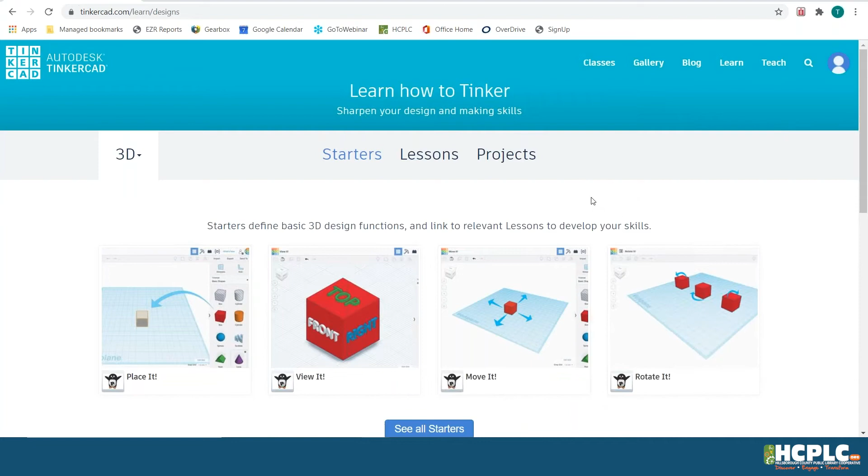And the most important one I want to highlight here today before we jump into designing something is Learn. So I highly encourage you when you do get logged into Tinkercad later to take a look at this Learn page, because it has tutorials that go more in depth on how to make things in Tinkercad. It has a ton of stuff that you can do. It has lessons that you can follow along with, and it also has projects. So it has a bunch of really cool things for you to do that you can play around with and really get a good grasp on how Tinkercad works.

So let's make something. So I am going to click on Create New Design. Okay, so you can see everything that populates here that comes up on your page. The first thing that I want to point out is how you make things in Tinkercad. So the most important thing to remember is that you make more complex shapes by using simpler shapes. So on the right-hand side of your screen here, you can see that there are a ton of shapes.

So you got your basic shapes, you got your box, you got your cylinder. I'm just going to scroll down here so you can get an idea of what you have. So these are all of the shapes that you have in Tinkercad to make your more complex item. So today we are going to make a very, very primitive house. And you're going to see how we're going to do that here in just a minute. Another thing that I want to highlight is what's called your work plane. So you can see here it says work plane on the screen.

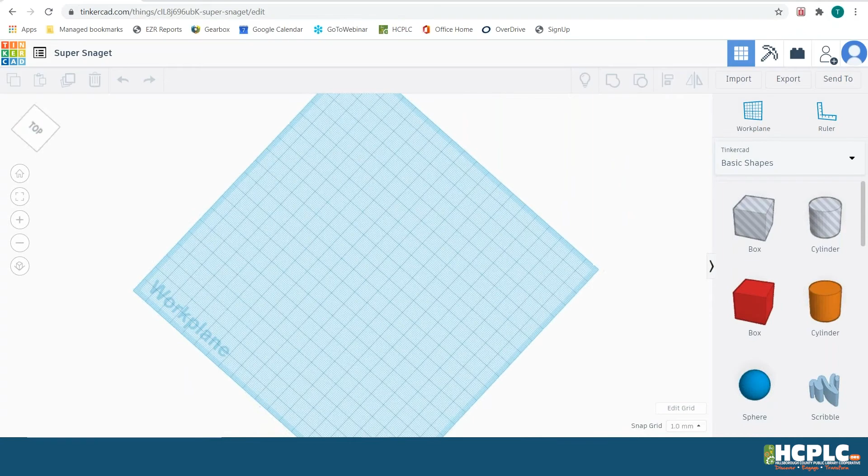So I can zoom in and out with my cursor. And if I hold my scroll wheel down, you can move your work plane around. And if you right click, you can look all around it. So this is going to make more sense when I drag out my first shape, which we're going to work with, the box. So I just click and drag my box onto the work plane.

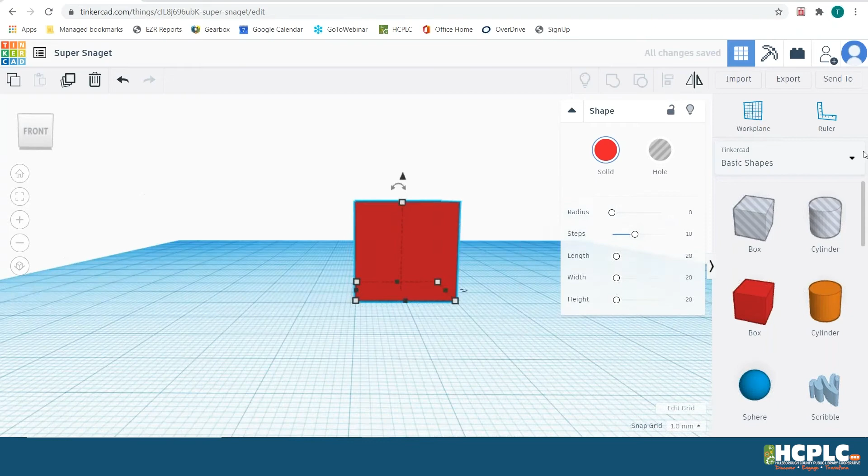And I see we got some questions. Don't worry, I'm going to get to them at the end. So here, let me actually keep that open.

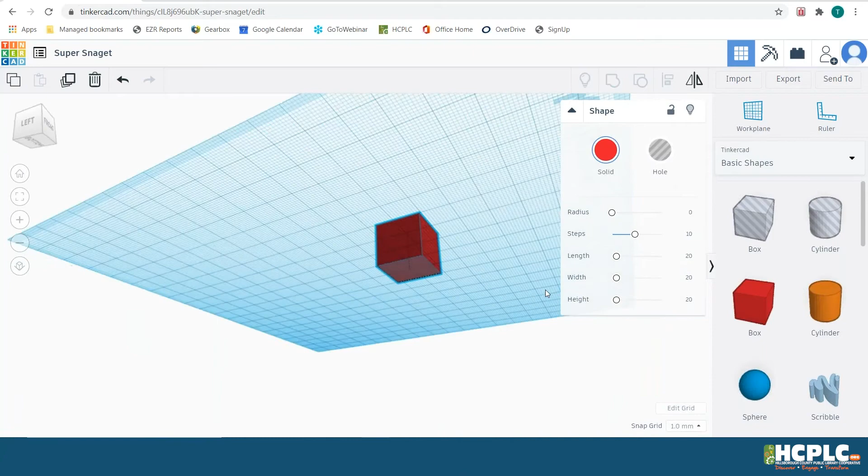So here we got our box. And now you can see what I mean when I'm moving around my work plane. So I'm using my right click and I'm holding it down to move around my work plane. So you can see the bottom of my box, I can see the top, and I can see the side. So now I am going to hover my mouse over my box so we can look at a couple of the elements of how Tinkercad works.

So Tinkercad uses millimeters. So that's how they measure things. So when you see, let me click on that again, this 20 by 20, that is 20 millimeters by 20 millimeters. You are able to change it to inches if you like, but I'm sure as all of the kids are learning in science, most scientists and most things in the scientific fields do use metric. So it's probably just a good way to learn your metric. And as you will learn tomorrow, if you attend our 3D printing class, a lot of 3D printers are configured to work in millimeters. So Tinkercad does use millimeters.

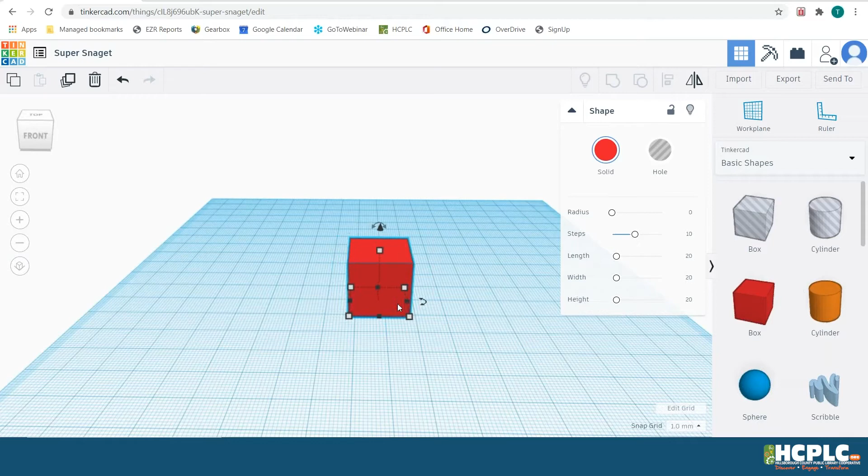Also on the grid, you can use your arrow keys to move your shape around the work plane. I'm using my arrow keys on my keyboard to move. And right now, my box is moving around by 1 millimeter. So each one of these teeny tiny, let me zoom in, each one of these teeny tiny little boxes is a millimeter. And the larger box is 10 millimeters. If you wanted to change how your items move, where it says snap grid here, you could make it so that it moves by 0.1 if you wanted to, or by 5. But today we're just going to leave that how it is.

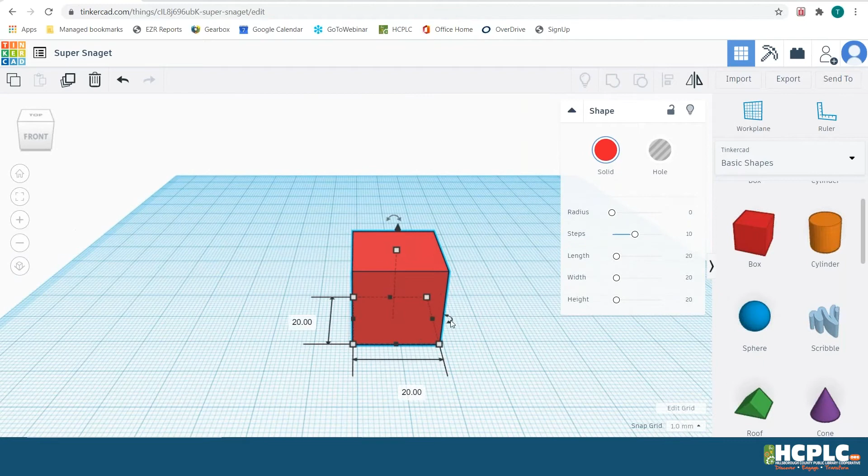Now I'm going to make a little house today, and I actually think that 20 by 20 is a little bit bigger than I'd like it to be. So I'm going to make it 15 by 15. So one thing to remember about Tinkercad is that there are a ton of different ways to do the same thing. So I'm going to just show you one way to change the dimensions of your shape. So I want mine to be 15 millimeters by 15 millimeters.

So I'm going to zoom in a little here so you guys can see it. I am going to take this white square here and I am going to move it in. So 15 by, oops, we got it there, 15. And if you click on the top one, you can see here it says 20 millimeters. I'm going to go ahead and leave that 20 millimeters. So that's one way that you can change the dimension of your shape.

So we've done our first part. We've designed the first part of our house. We made the base part of our house. Like I said, it's very, very primitive, but it's still going to look like a house. Actually, I'll show you another way that you can change it, on your panel here. Now this panel doesn't come up for every shape, which is why I'm not going to use it today, but I am going to minimize that here so we have a little bit more room.

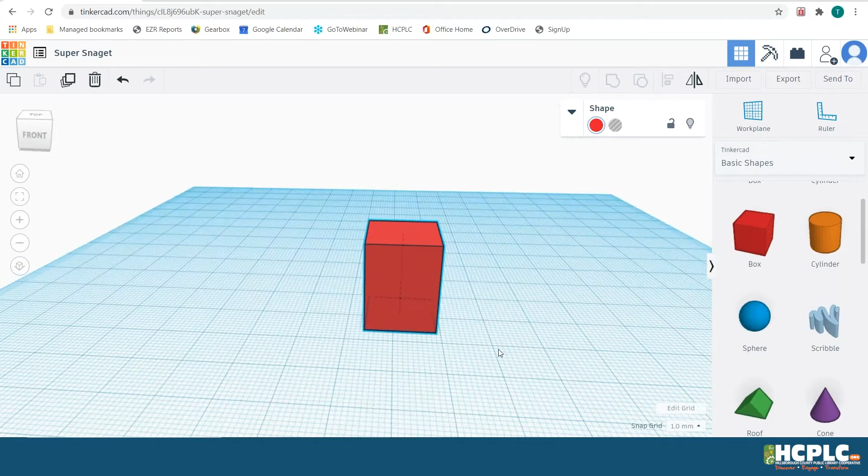So on to our next step. What does every house need? Every house needs a roof. So I'm going to go back to my panel here and I see my green roof.

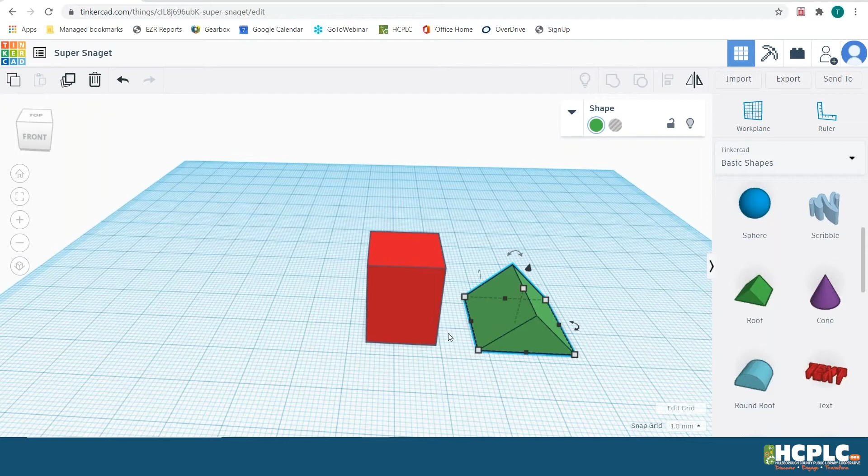And I'm going to drag it out. So now I have a roof. Now, what's the big problem with our roof here? The roof is sitting on the ground, directly on the work plane. We want our roof to be on top of our house.

So I'm going to actually leave the dimensions of my roof. I'm not going to change it. So it is 20. Oops, let me scroll out so you can see. It is 20 by 20, and I'm going to go ahead and leave that alone. And the reason why I put this down 15 by 15 is so that the roof is hanging over a little bit. You know, like when you're running home and it's raining, the roof is hanging over a little bit so you don't get rained on, kind of that same concept.

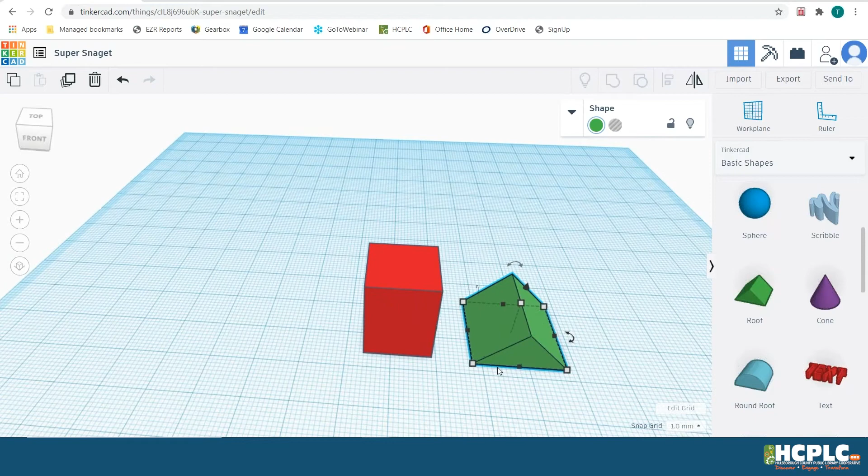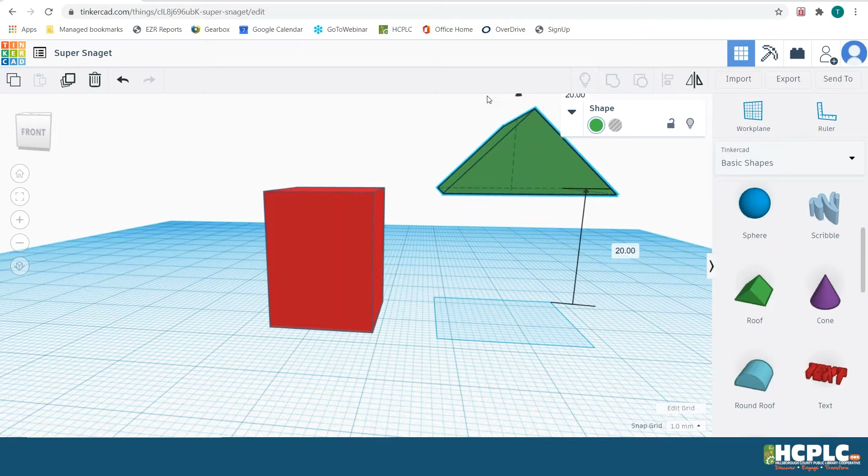So the first thing I am going to do with my roof is raise the roof so it can sit on top of my house, the base of my house. As we saw before, as I hover over this white square here, our house is 20 millimeters high. I call this little black thingy here a caret. So what I am going to do with my caret is raise the roof to 20 millimeters. So now it is up 20 millimeters high, ready to sit on my house.

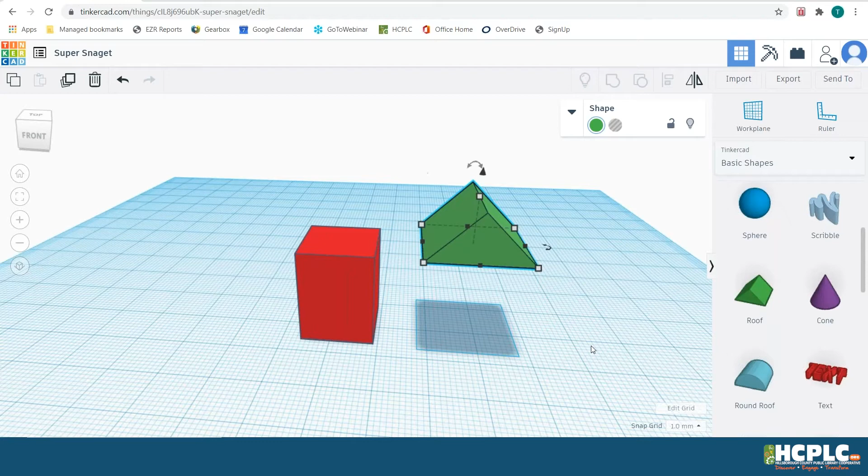Now, again, what's wrong with our house here? The roof is way too far away from the actual house. So we are now going to look into the concept of aligning and grouping. So how do we do that? What am I talking about? Let's go ahead and dive in. The first thing you're going to want to do when you are dealing with two separate pieces of geometry to make your shape is select both shapes.

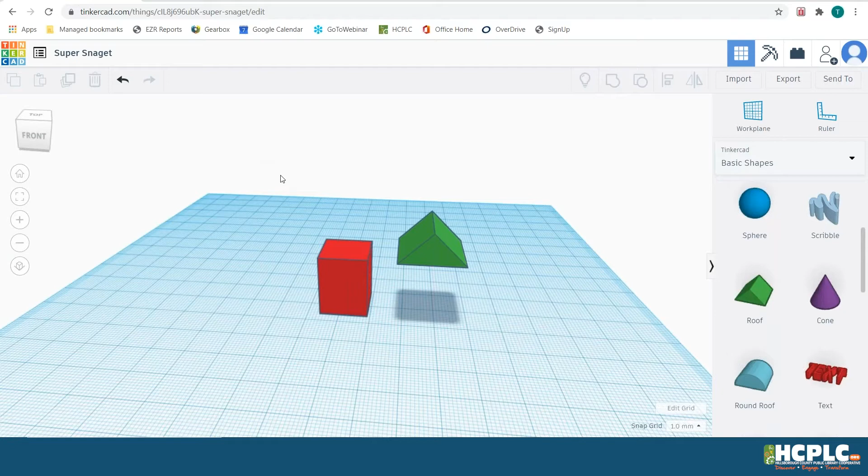The easiest way to select more than one shape is to draw a boundary box. Again, you're probably wondering, how do you do that? It is really easy. I have my mouse here, you can see it out to the left, and I'm going to hold down my left click. I'm holding it down, and I am going to start to draw my boundary box. Remember, you're holding down your left click to make this boundary box. And I am going to select both items. Once both items are within your boundary box, you let go.

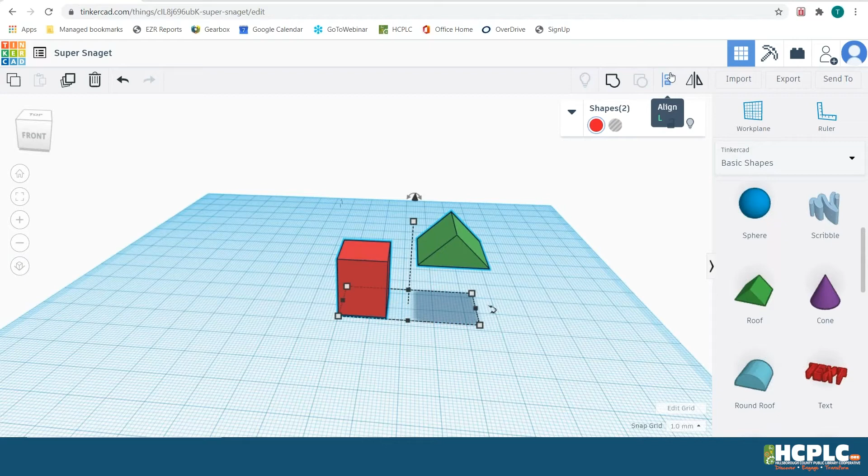So now both of my items are selected. Oops, I just unselected them. As you can see, now they move around together. So that's step one. Step two, again, our roof is way over to the right-hand side of our house. So up in your toolbar, we are going to align. When you hover over the different items here, you can see what they do. So we are going to select align. And you can see there's a bunch of little dots and lines that came up. When you hover over each line, it tells you how the shape will look once it's aligned.

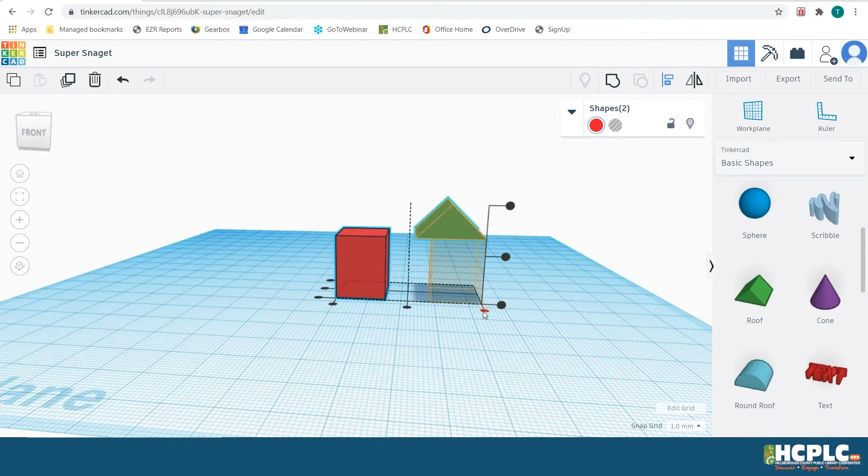We want our house and our roof to be sitting on top of one another. Let me scroll in so you can really see. When you hover over, you can see the outline of what it'll look like once it's complete. So that's what we want our house to look like, right? We want to make sure that it's aligned perfectly. As you saw before, I could technically drag everything over myself and keep using my mouse to line everything up.

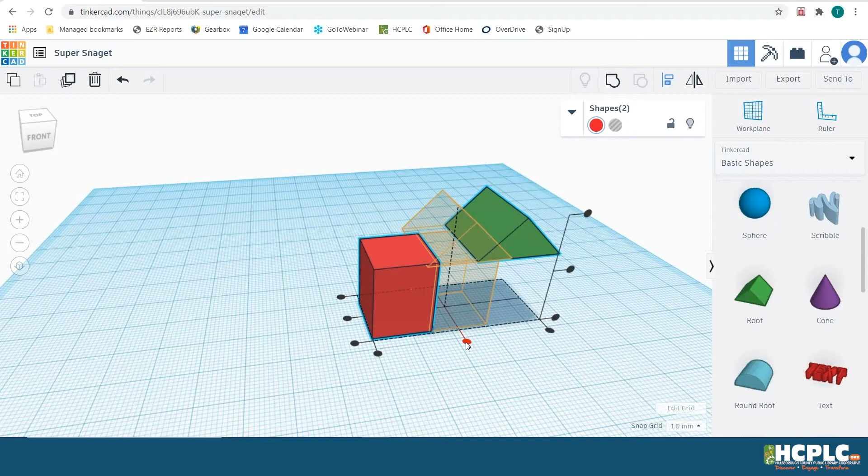But what I really like about our align button is that it makes everything perfect for you. Oops, almost perfect. I need to align it one more time. There we go. So now, as you can see, the roof is perfectly aligned with my house. And once I'm done, I can just click away. Now, there's one more problem with my roof and my house.

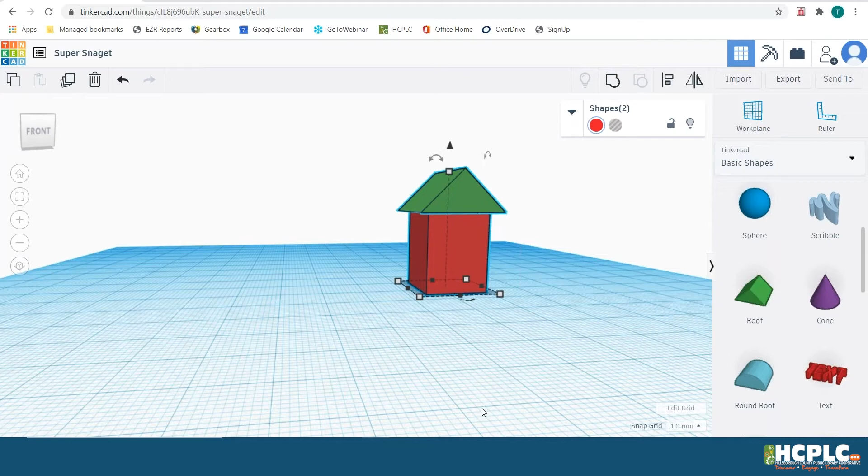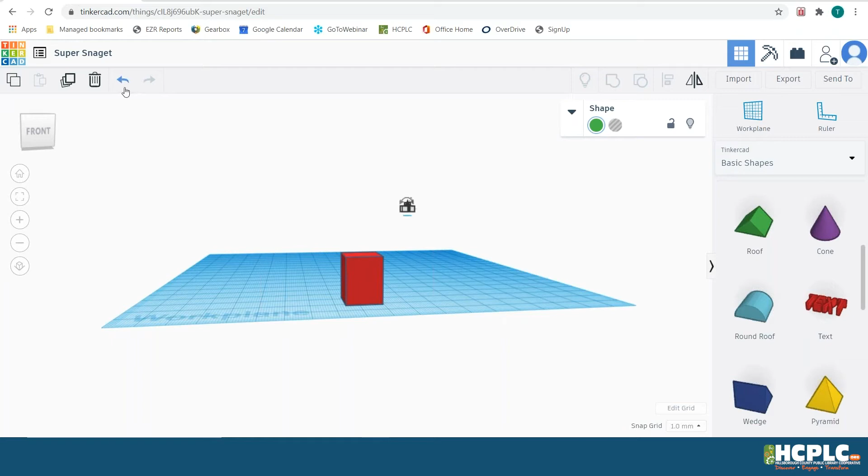Uh-oh, they're not connected. So this is another cool thing I want to tell you about Tinkercad: it automatically saves everything. So if you mess up or forget to save, it's already saved. Another great aspect of Tinkercad is the handy dandy undo. I'm going to press undo because I dragged my roof away from my house, and now it's back on there.

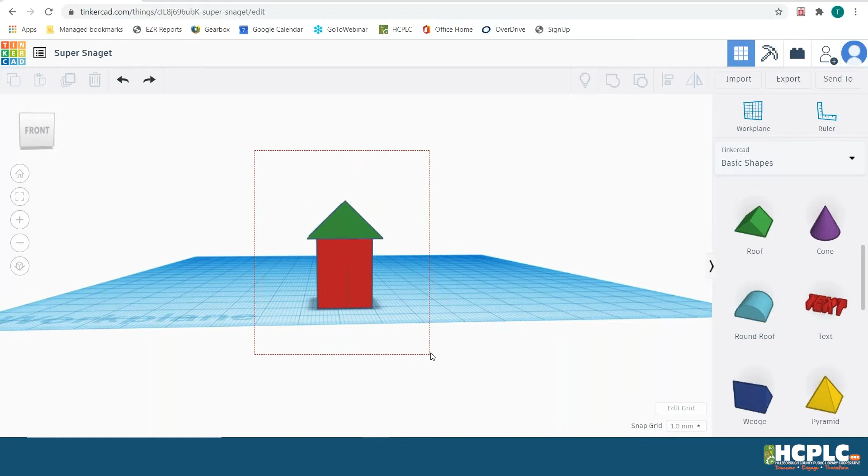In order to make sure my roof and my house are connected, we are going to group them together. So how do we group? Remember that boundary box I talked about earlier. I'm going to left click, hold down the left click key on my mouse, and draw that boundary box. Now both of my items are selected. I'm going to go up to my toolbar up top and select group. Remember, when you hover over each thing, it tells you what it is. So I'm going to hit group.

And now my house and my roof are attached. Oops, that's where the handy dandy undo button comes in handy. So here you go, now my house and roof are put together, and now you have a complete-ish house. Another way you can make sure your item is grouped together is that they change to the same color. Remember, our roof was green, now it's red to match the rest of the house. So now you have a nice house put together.

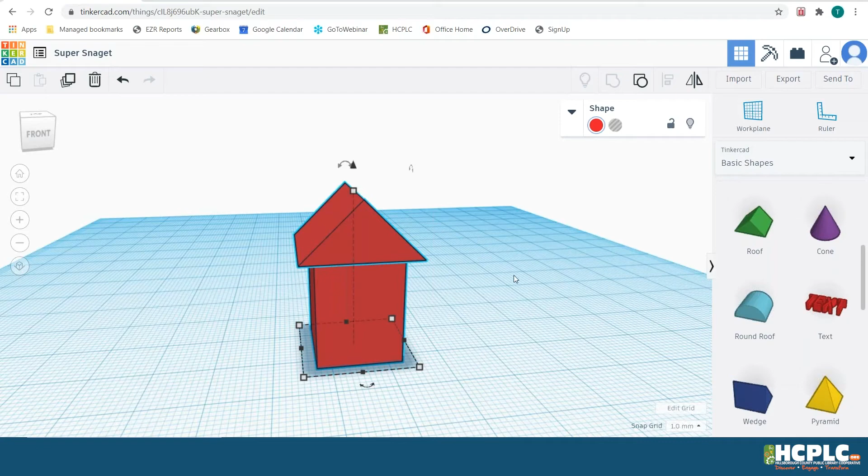So the last thing, and I wish I had more time to show you more because there's so much cool stuff Tinkercad does, but I know we got some questions so I want to make sure we get to those. Let's say, oh no, I don't want this roof, or I want to make my roof bigger or smaller.

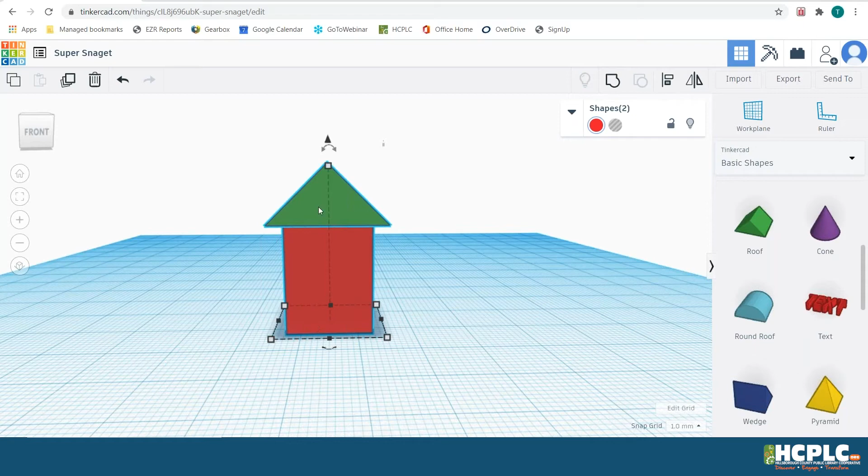You can always ungroup. Ungroup is right next to group. So if you want to take them apart to tweak or fix things, all you have to do is hit ungroup. Again, you can tell your items are ungrouped because of the colors. So I'm going to group them back together.

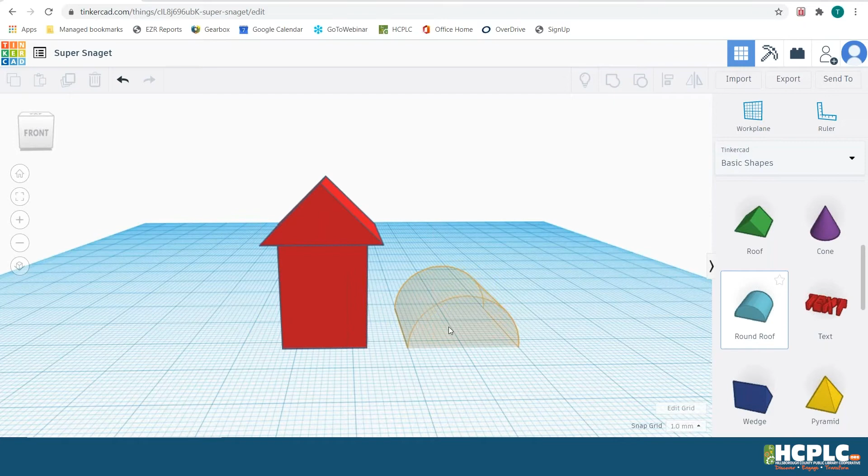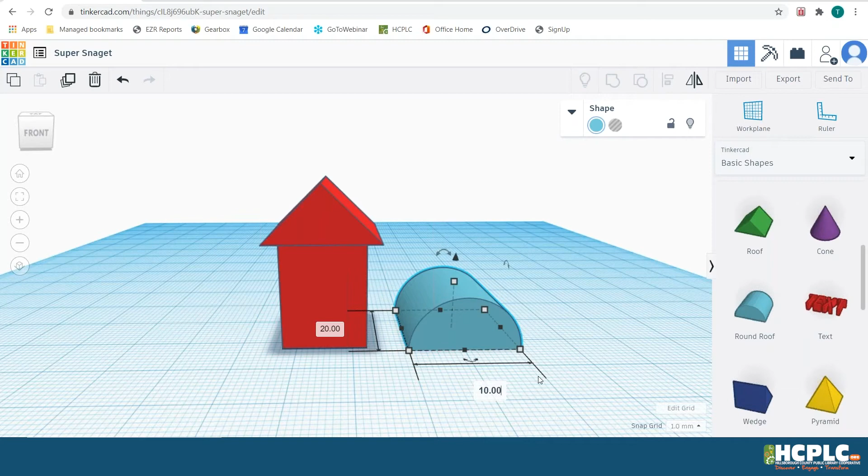Last but not least, your house needs an opening, so we are going to create one. I'm going to use the round roof, although a little differently. I'm going to drag out our round roof. Remember how we changed dimensions? Let me show you a different way to change dimensions. I want this value here to be 10. If you double click on the value, you can then type in 10 and change it. That's another way you can change the size of something.

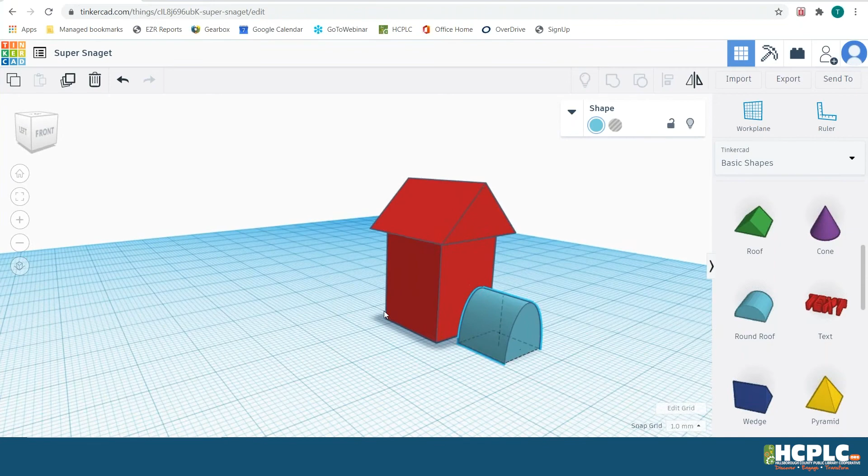I'm just going to drag this one in here, and make that 10. There we go. Again, our house needs an opening, so I am going to position this shape to create my opening. This is where a mouse definitely comes in handy. I'm using my mouse right now to position the opening of my house. Now I clicked on my opening and I'm going to push it in a little bit into the house. I know you're probably at home thinking, what is she about to do?

So one thing you may want to do with your shapes - remember how I said you can put different shapes together to create objects - you can also use a shape to subtract from an existing shape to make another shape. Let me show you how that works. I'm going to reopen that panel I discussed earlier, and you'll see an option called Hole. I'm going to click away from everything to make sure I select the one thing I want to use. Let me reselect my opening. I am going to make this opening into a hole.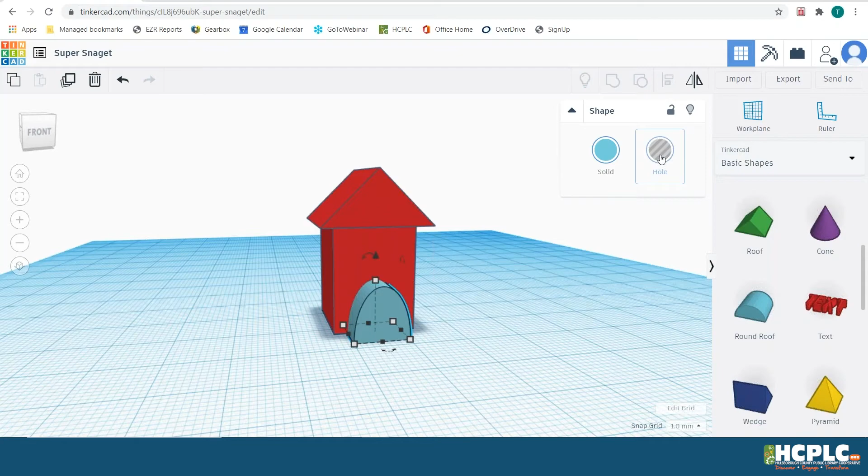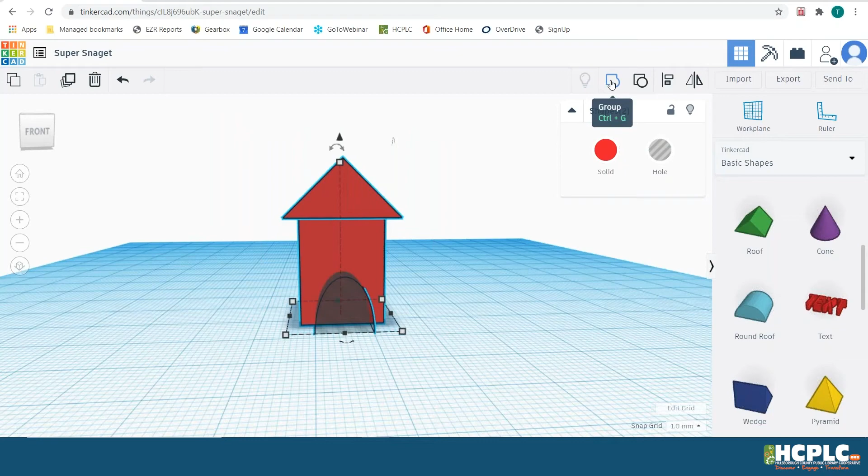Now you can kind of see that it cuts something out, but let's go ahead and complete this. Don't forget your handy dandy boundary box. I'm going to left click and make sure both my hole and my house are selected. Don't forget about group - when you want to combine shapes, you've got to group them. So I'm going to hit group. And now you have an opening to your house.

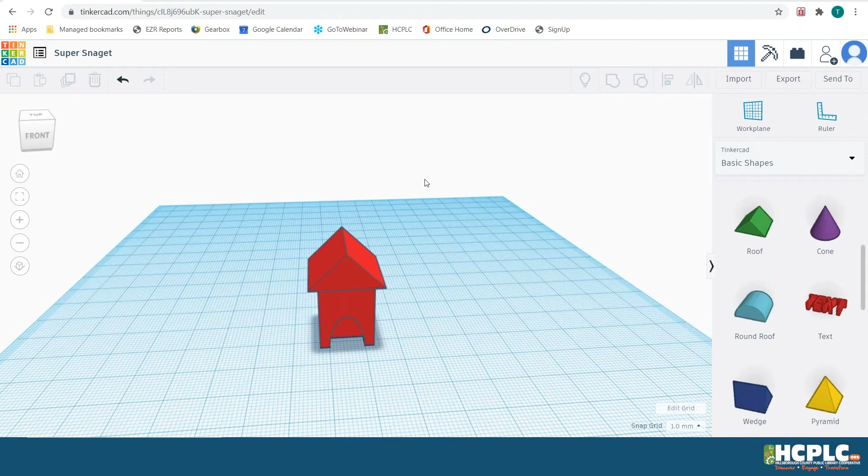First question: can you make every chess piece in Tinkercad? You theoretically could. If you wanted to create an entire chess set using Tinkercad, you absolutely could. Based on what we did today, you can use the shapes on your panel to create your own shape. It's entirely possible to create a chess set. You can make whatever you want. I created jewelry in Tinkercad, I made a necklace. Wherever your imagination takes you, you can create it in Tinkercad.

Let's see other questions here. Oh, this is a good one. What is 3D printing and how do you do it?

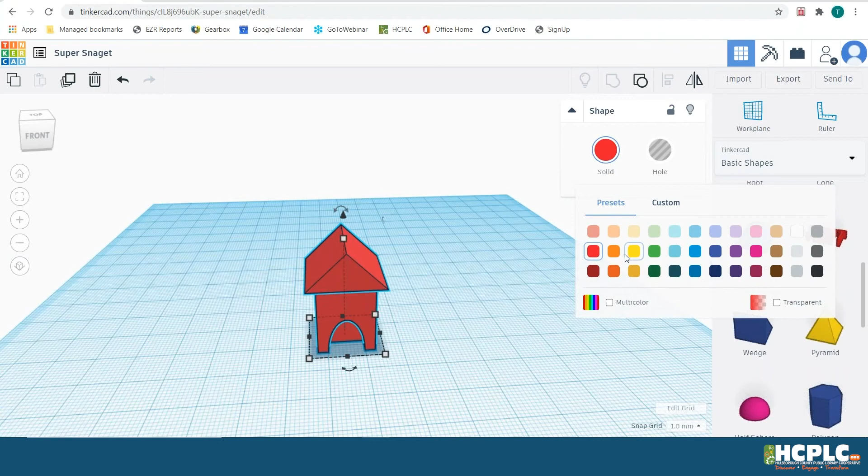Next question: is there a way to change the color after you group? Yes, let's take a look. Say you don't want your house to be red anymore. Here where it says solid, you click on that, and here are all your options. I believe you can make your own color, but for time today I'll just pick one. My favorite color is orange, so you can make your house orange. There's a bunch of different colors you can do here.

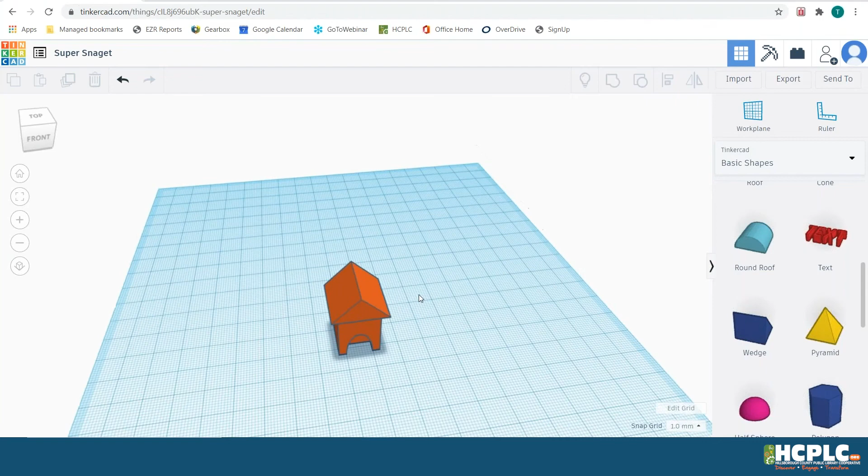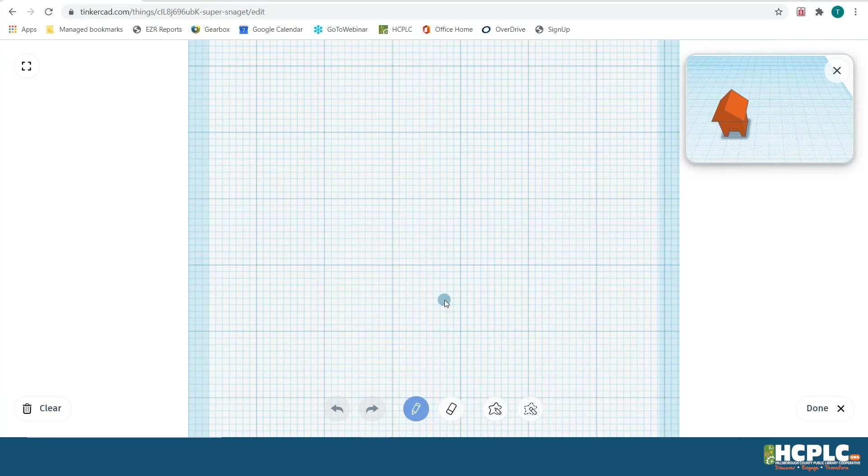This is actually a new thing. I've been teaching Tinkercad for about 6 years, and this is something new I saw when putting together this class. There's a shape, air quotes here, called Scribble. I'm going to drag that to my work plane, and using your mouse or touchpad, you can make your own shape. Let's see what I'm going to do — I think I'll just write something.

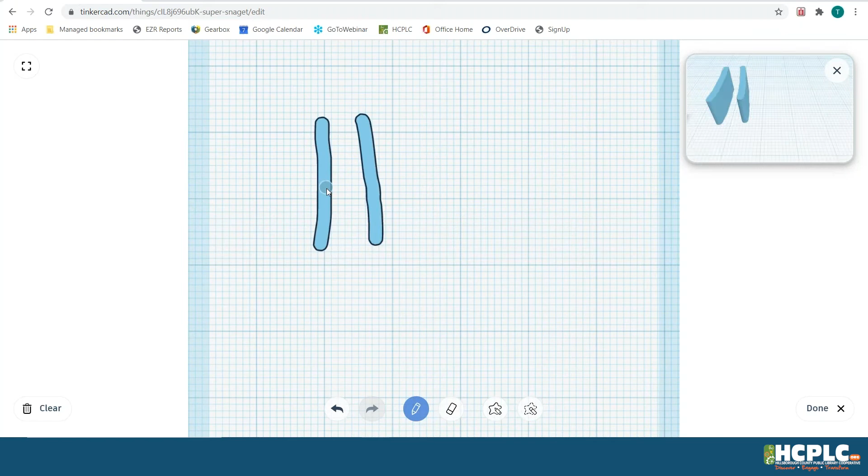I'm going to write out 'hi' — hey y'all. Once I've created my shape, I go to the bottom right-hand side and hit done. And now my shape is created. You can see that's really cool. So when we say you could create any shape, you can literally create any shape. It's really cool — oop, I just saw something else there.

One more question. If you have a 2D outline drawing, can I stretch it out in Tinkercad to make it 3D? So you can. I wish I had time today to show you how to do that, but it is definitely a feature in Tinkercad that exists.

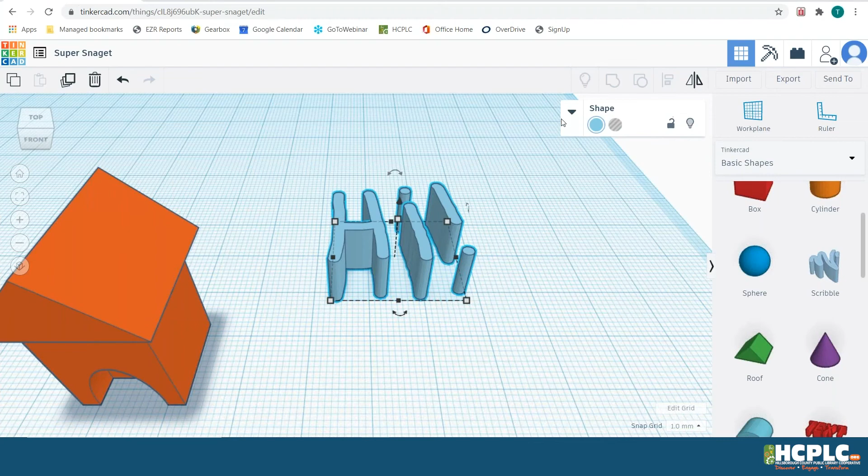In fact, let's go back to that Learn panel that I was talking about earlier. Let's see, how do we get back to it? I might have just, yep, there it is. So on our Learn panel, you have starters and you have lessons. And also, I think in the search, there's also an FAQs, but it'll tell you how to do that.

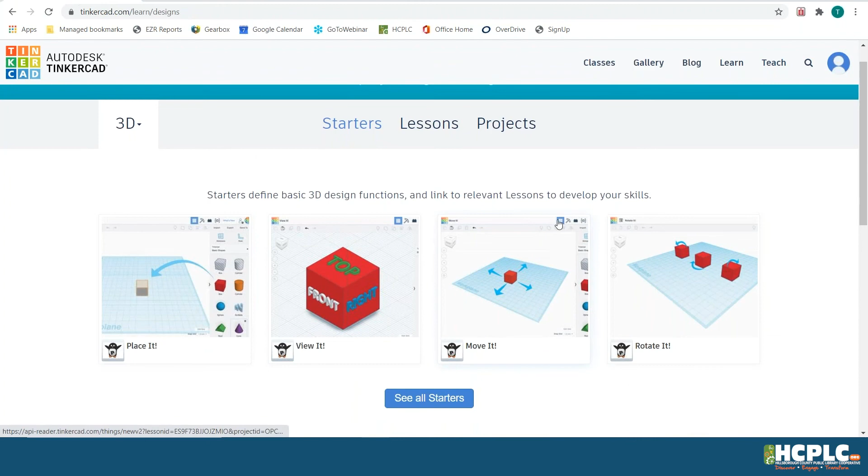So you can import an image. I think it has to be an SVG. I don't think it does JPEG or PNG, but that should be easy to convert on your computer depending on what you have. But it is possible for you to do that. So again, I wish I had time to show you how that works, but it is possible for you to do it.

All right, let's see if we have anything else before we sign off here for the day. All right, so let's see, any last minute things before we sign off here. Let me go back to my page here.

Remember how I mentioned before, Tinkercad saves everything that you do, and it also gives them really funny names. So the project that we were working on today, Tinkercad decided to call it the Super Snaget. So I'm going to go back into my Super Snaget. And there's my hi. So yeah, you can draw your own stuff.

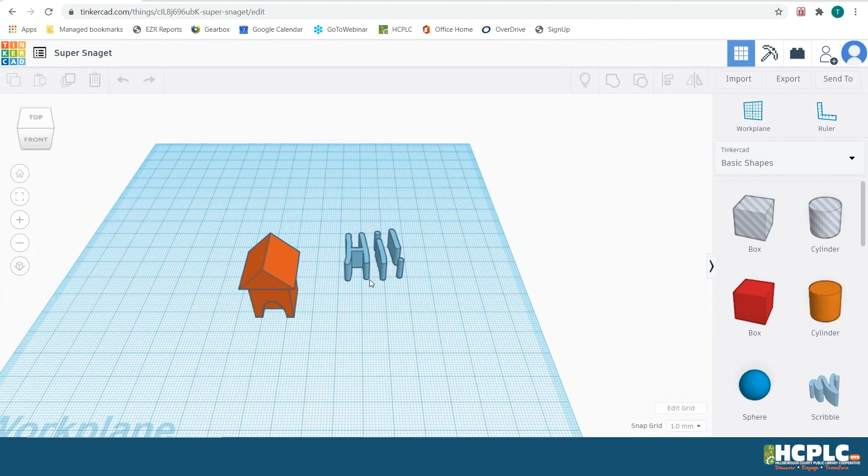And actually, let me show you one more thing. One more thing before we go. Let me just make sure I didn't miss any last minute questions.

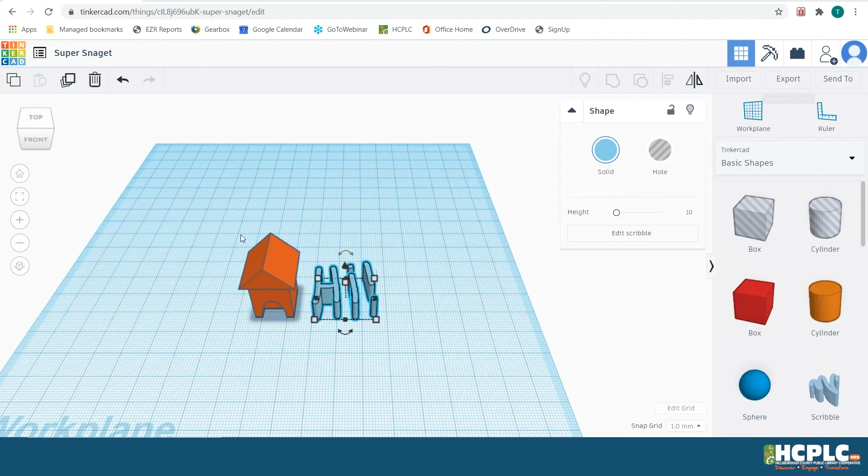All right, so one thing that you may want to learn about, and this will come in handy when we do tomorrow, is export. So let's say that you got your hands on a 3D printer and you want to print something out. So when you're ready, you would hit export. And this is really important to remember: most printers, including the one that we will be using tomorrow, takes things in STL format.

So if you were ever able to print something, in the past, you may have heard that 3D printing was something that we were able to offer in the library. Of course, because of our current circumstances, unfortunately, that is not something that we were able to do at this moment. Hopefully, it's something we'll be able to do in the future. But let's say you do have a friend, or there's a makerspace around that you have access to, you would export your item into an STL, and that makes it ready to print.

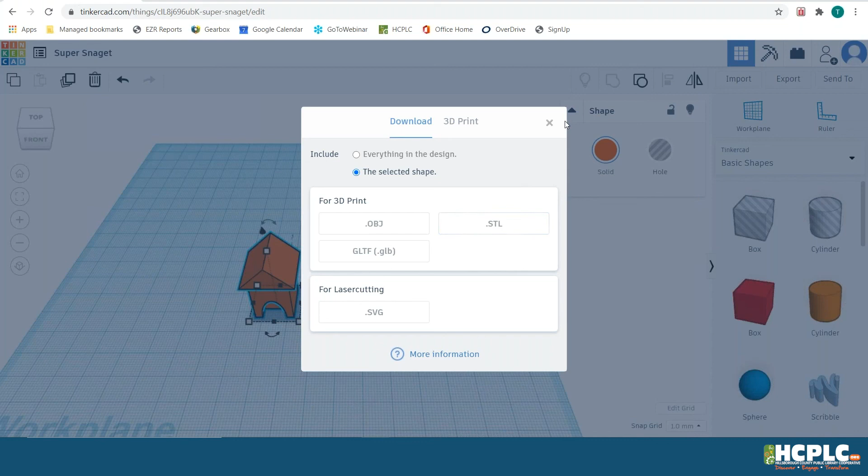And we will talk a little bit more about how things print tomorrow at 4. So this is the very basics of design. So let me jump back over to my slide here.